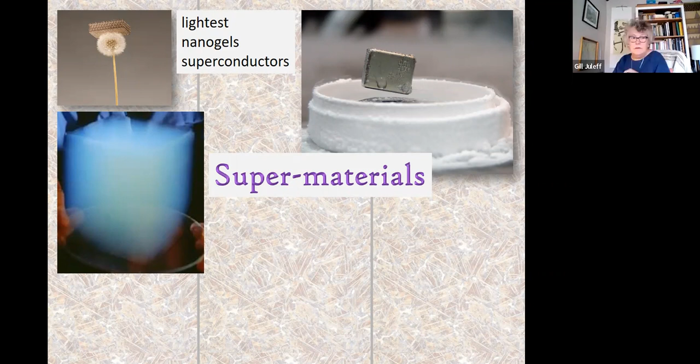But let's think about why... I'm not getting my PowerPoint to move on. Why is that? Oh, I think I know. There we go, sorry. Probably the original super material was in fact steel, and we're talking about a material which was first invented or emerged over 3,000 years ago. This is an amazing alloy of iron and carbon, and the fact that you need less than 2% of carbon in iron to create this incredible alloy. But getting 2% of carbon into the alloy is not a simple task to persuade it to go. So there's a lot of technology involved.

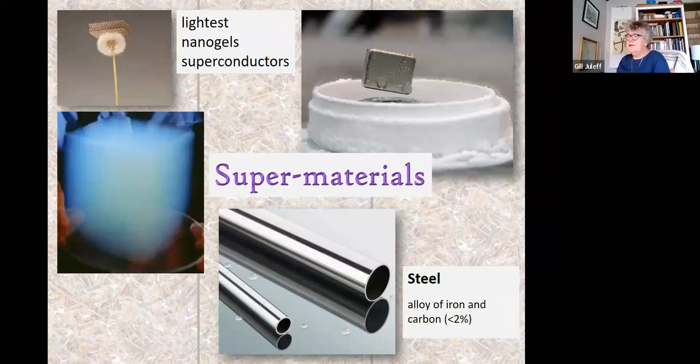So what can steel do for us? It gives us the chance of making tools that will cut and take edges. It allows us to make domestic tools, agricultural tools, and to cut very hard materials and carve them. We know from Sri Lanka the amount of carved granite - you can't carve the granite in Anuradhapura without steel tools. It allows you to make blades and edges that are hard, strong, and flexible. And once you can do that, you can start making weapons.

There's nothing that drives technology like the opportunity to make weapons. It's a sorry thing to say, but it is the reality. So this is the material we're dealing with. I'm going to introduce a little bit of technology - you're engineers, so we ought to be able to deal with this.

Making iron and steel is not easy. It takes a great deal of technological know-how and experience, and what I want to do here is look at some of the ways we can make iron and make steel. If you look at the bottom of the screen, this bar along the bottom is just a very simple way of describing different types of steel and the amount of carbon you need in the iron to create the steel.

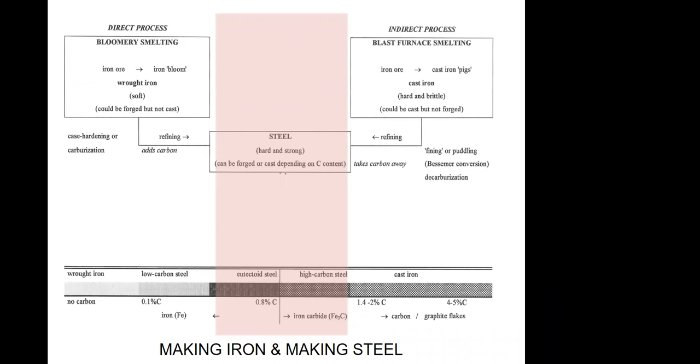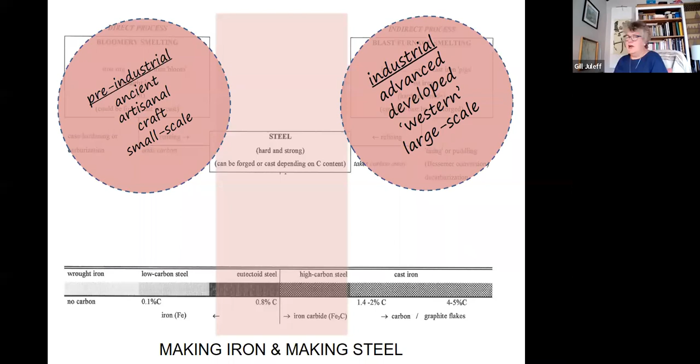It's this central area that is the holy grail of iron metallurgy, where we're making these steels, and how we get to that point. On either side of that, the direct process is perhaps what we would call the pre-industrial, the craft, the small-scale smelting, where I as an archaeometallurgist do most of my work. On the right-hand side, the blast furnace technology is what we would call industrial - it's advanced, developed, large scale, and in many ways dominated from a Western technological perspective.

Okay, I don't know, somebody's got a microphone on, I think, yeah?

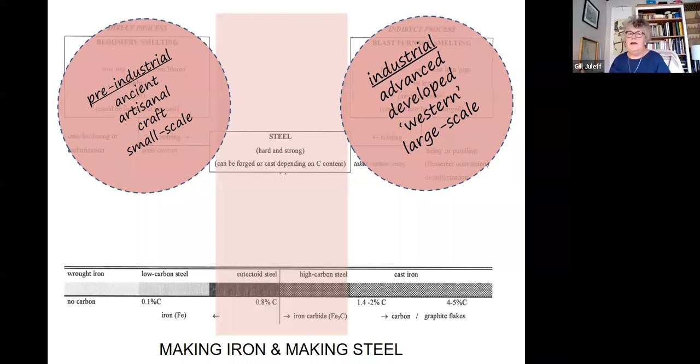So this is the indirect process. If anybody says to any of us here in the audience, iron making, making steel, these are the sorts of images that come into our head - blast furnaces, big industrial processes, very advanced.

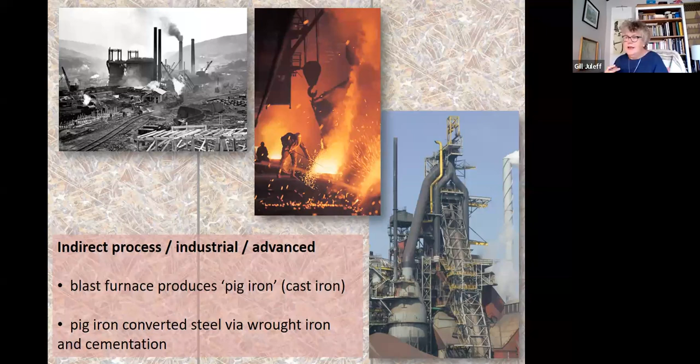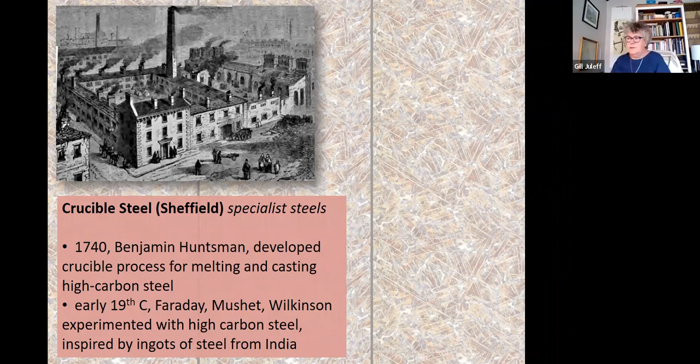On top of that, if we think about taking the material from a blast furnace and making these steels, particularly trying to make the really high quality steels, we have in the Industrial Revolution the development of specialist steels or crucible steels in places like Sheffield and elsewhere on the continent. We have famous steel makers - Huntsman of Huntsman Steel developed a crucible process for making high carbon steels. Faraday, Mushet, Wilkinson - all big important names in the development of steel technology in the 19th century, and big players in the history of the Industrial Revolution.

But what is really interesting, and rarely talked about, is that these people were taking their inspiration from high carbon steels coming from India, ingots of high carbon steels. We tend to sideline the fact that so much of the inspiration for the Industrial Revolution in the West, in Britain and in Europe, was actually being driven by technological developments in Asia.

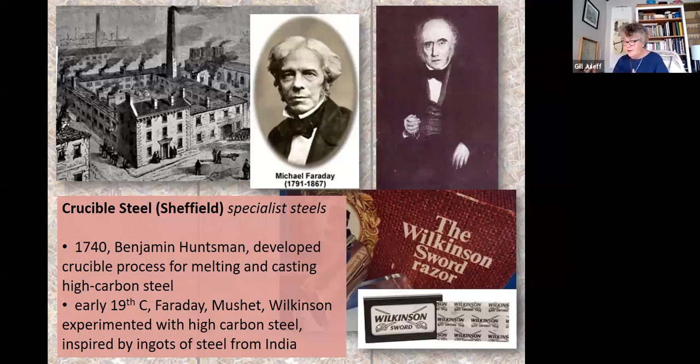Making iron and making steel takes an enormous amount of technological knowledge and experience. It also requires a high level of social investment, organization and planning. Because of that large scale of investment in the fuel, the apparatus and the infrastructure, and the months of planning before you even get to smelt iron, you need to succeed. There's an economic imperative to succeed. You can't play with this. It has to give a return. And it's in many ways why...

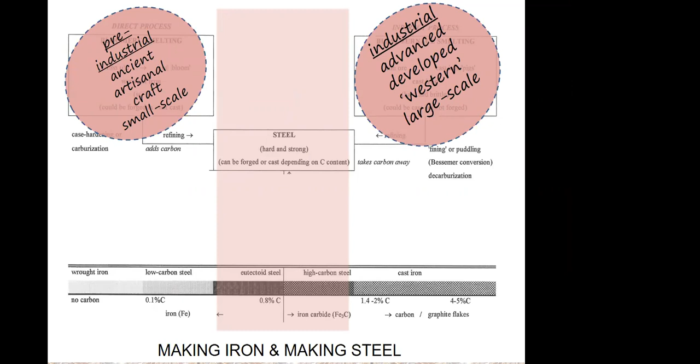...the whole Industrial Revolution dominates our thinking. When we think about making iron, we think of these big players who have the political ability to invest in this stuff. So we think about Britain, we think about Europe in the 19th century. More recently, in the late 20th century, we think of America, the USA, China, and also India.

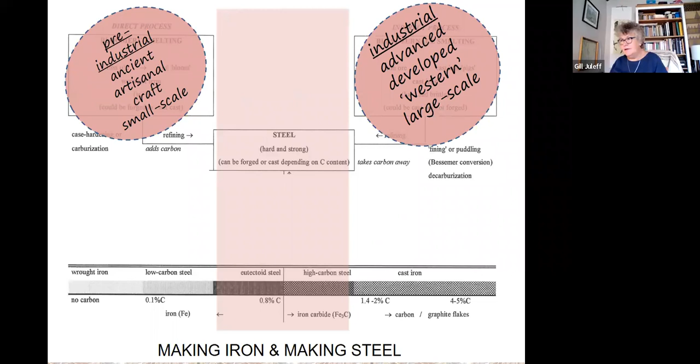We don't tend to think about places like Sri Lanka, which is why all of this is unexpected. But we do have some indications, some hints that there is more to understand about the technology of making iron and steel in Asia. And we also begin to understand there's a greater complexity to this rather simplified model we were using.

We know that the Industrial Revolution was taking the ideas of crucible steels from India, and we also now know Sri Lanka. We also now begin to appreciate that there are ways of smelting directly from iron ore to steel, and we see some of that in Japan, now in Sri Lanka, and occasionally in Africa. So it is a more complicated story.

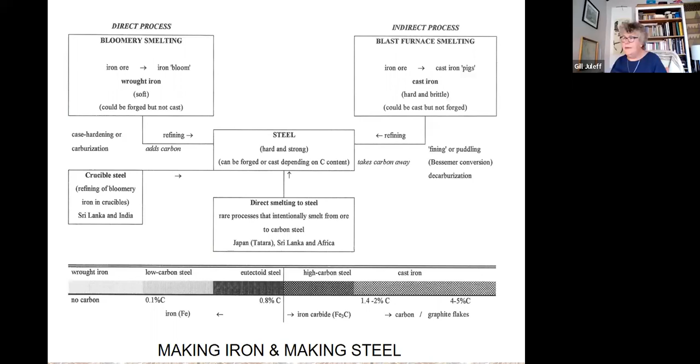To think about some of those hints about the technological history, and to come a little bit more locally in Sri Lanka, we can look at a treatise written in Arabic. This is a translation and interpretation of a treatise written in the 9th century by a very revered writer called Al-Kindi, who wrote a treatise on the kinds of swords and iron. In it, multiple times he mentions the quality of Serendibi, or Sri Lankan steel.

For a very long time, scholars thought that this was referring to steel that was made in India and was transshipped through Sri Lanka. Nobody really could quite believe that Sri Lanka was part of this production technology for steel.

If we look at foreign visitors to Sri Lanka during colonial periods and earlier, we see mentions about the quality of the iron and steel. We've got quotations here from 1608: 'These Sinhalese are very apt at manufactures and have a very cunning and delicate hand for iron and steel. They make all sorts of arms, which are the best and most valued in the Indies.'

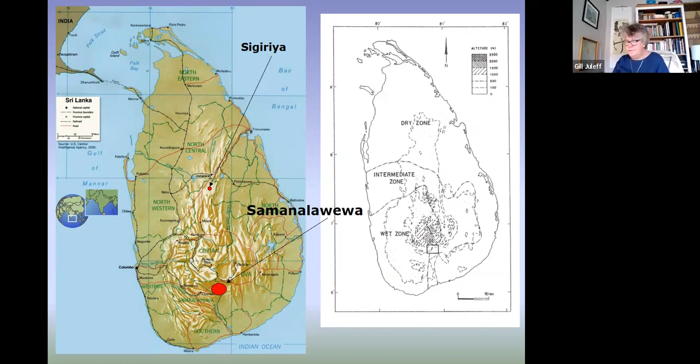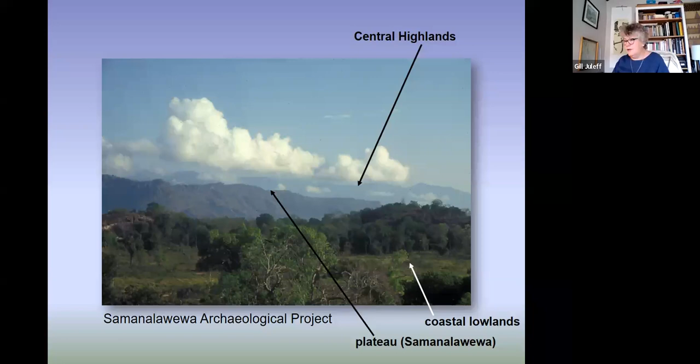But on that plateau, we have a very varied terrain, hilly terrain. We have cultivated valleys where we have rice cultivation, small village settlements, but the landscape is actually dominated by jungle and windswept hills. So certainly when we started the work back in the 1980s, it was not densely populated, and it's the hilly terrain that was where most of our work was concentrated.

Just to give you a short summary of what came out of our initial field survey: we did a survey that took us 3 months, with an additional 1-month survey extension, covering a core area of 58 square kilometers, which we then extended by another 20 square kilometers. Within that area, we identified and recorded 253 sites. These are all sites because this was a survey conducted with the Archaeological Survey Department, and we worked with a fantastic team there through the whole of this project.

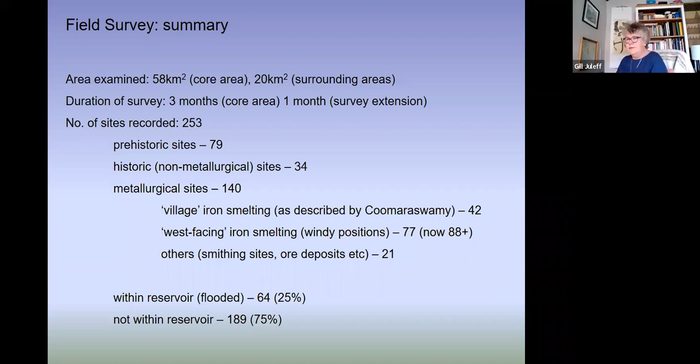So how am I doing for time? Not too badly. So let's look at what we found during our field survey. I just wanted to... no, you're all still with me.

Let's have a look at just a couple of points that came out of our field survey, focusing particularly on the west-facing sites. What we were finding was that we had waste slag, the rubbish from smelting, which is simply left on the site, dumped on the western slopes of these hilltops, not on the summits, but on the western side. So everything was pointing towards and facing towards the west.

What we also found was this slag waste has a very distinctive morphology. One of the things that people like me do when they study archaeometallurgy is to look at this waste and see what it tells us about the process. So the shape of this waste and the shapes that it takes is very useful, important, valuable research material.

So here we have some very unusual shapes of slag. Here's an intact piece which is over 1 meter long, which is exceptional. It's a long linear shape. And in this one, I don't know how clear it is, I hope it's visible to you.

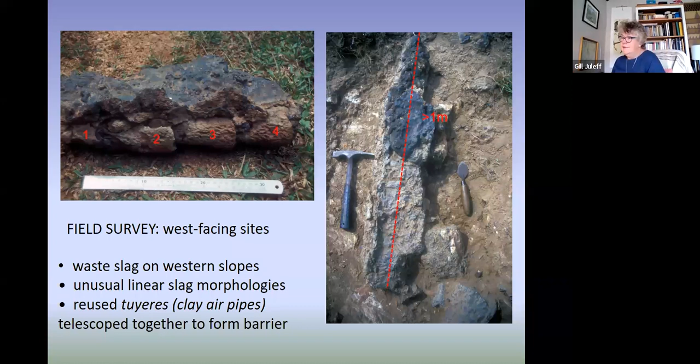slag shapes is that they do not conform with anything that we would conventionally see from traditional Western furnaces, the sort of thing that we would normally expect to find.

So, moving on, the evidence that we had from the field survey was sufficient for us to have funding to carry on and excavate one of these west-facing sites. And the site we chose is very close to the dam, the Samanalawewa Dam itself.

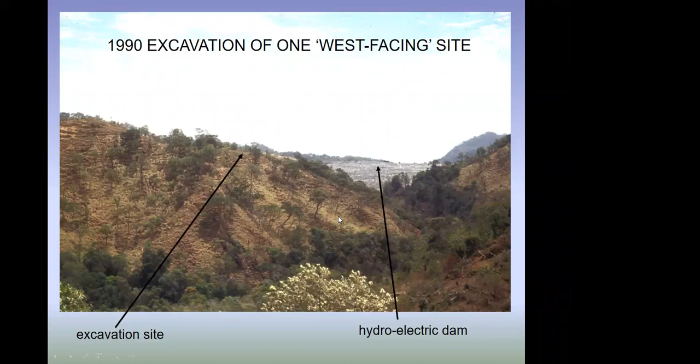This is the site that we excavated over a period of about 6 months.

What's important is that we have a series of radiocarbon dates from this site, and they date the activity on this site to between the 7th and the 11th centuries. Interestingly, coinciding with the date of Al-Kindi's Islamic treatise on swords and iron, where he discusses serendibi steel. So these dates coincide. On this site, we excavated something like 41 separate furnaces, and we only excavated less than 20% of this site.

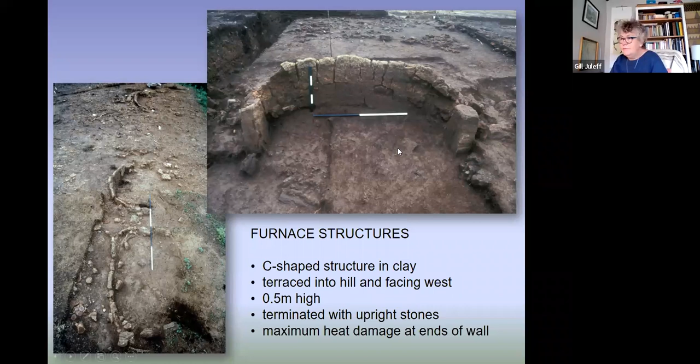There is the back wall of the furnace, that C-shaped wall, and here are the two upright stones. So this is very active, and the fact that you've got molten slag that's able to flow 2 meters away from a furnace into the face of these very high velocity winds suggests that this is working at very high temperatures.

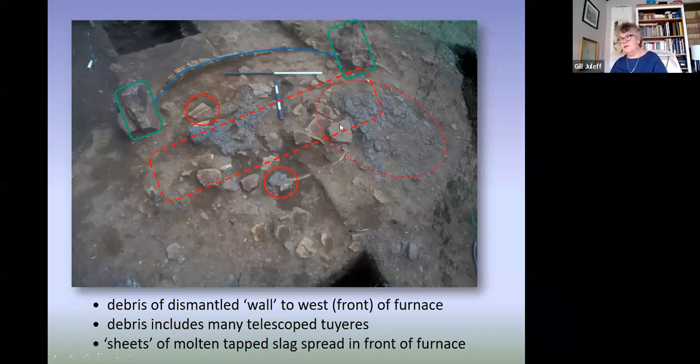So moving on from the excavation and the survey, the evidence that came from the survey and the excavation was strong, convincing, told a very good coherent story. It demonstrated a widespread industry across this region with multiple sites, all based on this very unusual linear shaped furnace that was using the dry southwest monsoon winds. That was all very convincing from an archaeological point of view.

But the problem that I encountered was when I presented that data to the international community of archaeometallurgists, I was met with enormous skepticism. They were simply not prepared to believe this evidence, because they said that no iron smelting furnace has ever been demonstrated to be able to operate using the wind. The furnace is too long, it's too low, and it's in Sri Lanka, and nobody would expect that.

So on the basis of that, we concluded that the only way we could take the research further was to actually reconstruct a furnace during the monsoon, to see what actually happened, and if it could reach the temperatures we needed it to reach to be able to smelt iron, and how it functioned. That's what we set out to do initially in 1994 and then again in 2007.

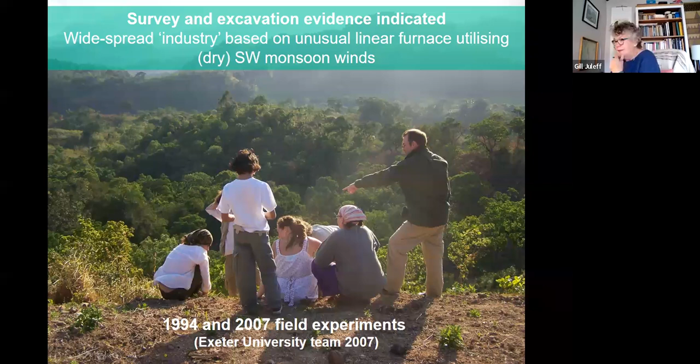And so the next set of slides come from the various different experimental smelts that we've undertaken, and they're just to give you an overview of that process.

It also gives you an idea of the amount of social investment and planning that has to go in before you even get to the point of being able to smelt iron, or at least attempt to smelt it. I need to say, I had never smelted iron before doing this, and I'd never actually even seen an iron smelting furnace in operation. So I was definitely working in the dark, but working off the archaeological evidence. We were simply trying to recreate the archaeological evidence to see what happened.

So to start with, we needed a lot of fuel. Our local blacksmith friends made over a ton of charcoal fuel for us from species we knew were used in the archaeological record.

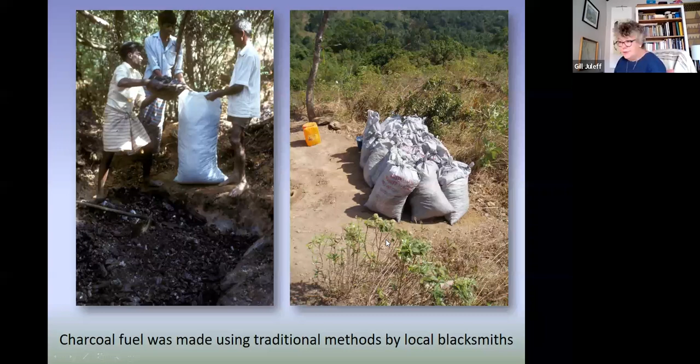We collected iron ore from local sources. They're all surface deposits. It's a really good lateritic iron oxide, mixed iron oxide, which is very good for smelting in this sense, because it has a good iron content, over 60% iron content, but plenty of other minerals which help in creating the slag and help convert the iron oxide to iron metal.

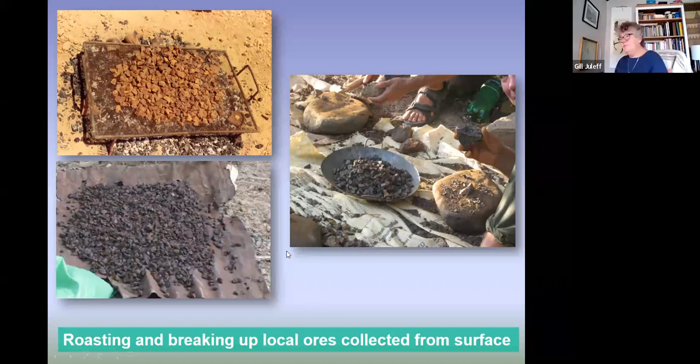The other thing which is important and tends to get forgotten is the clay used to build these furnaces. These furnaces have to operate well over 1,000 degrees centigrade. This clay has to resist those temperatures. It has to remain standing. So the container for iron smelting is extremely important.

With the help of our local villagers at Samanalawewa, we put together a mixture, a very complicated mixture of paddy field clay, termite hill clay, river sand, straw, and rice husk, which was very carefully mixed and matured to build the furnaces.

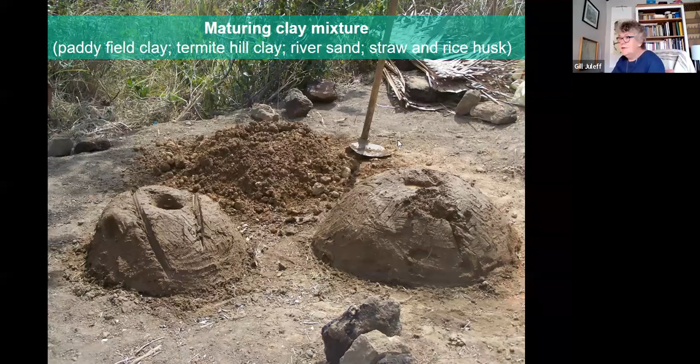So we then built our furnaces. All of this construction is based on archaeological evidence, apart from the wooden poles that we put in here, because we struggled to get our wet clay wall to stand upright. So we used poles just to help keep it stable, and they burnt out during the smelting.

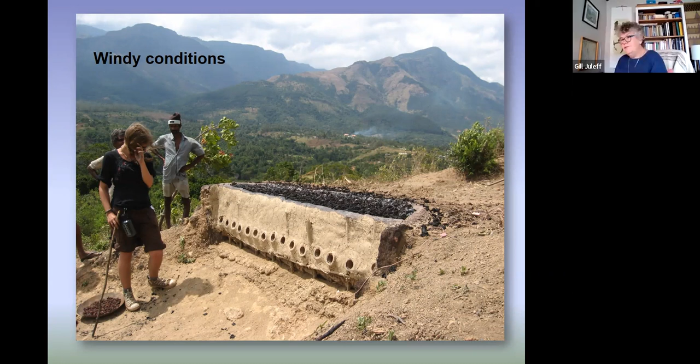This is what it looks like when we put the first iron ore in the top, on top of the burning charcoal. And that is replenished all the way through the smelt.

We were using anything up to 200 kilos of charcoal per smelt and 100 kilos of iron ore. So we keep replenishing that over 6 to 8 hours. The thing to note here, amongst the engineers and scientists, is the scorching on the top of this front wall.

There's very clear scorching, which you don't see to the same extent on the back wall. We'll see more of that as we go through.

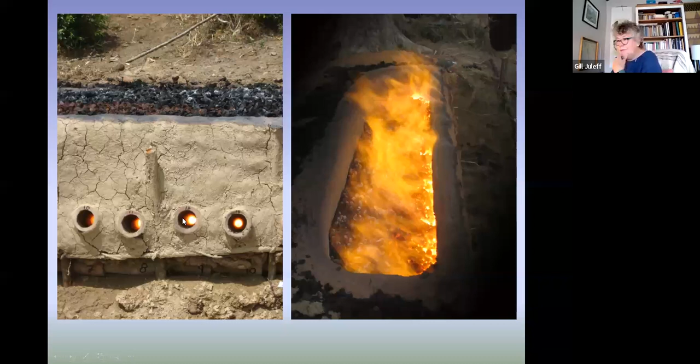Again, the same thing, but what we're beginning to see now is the flow of air and the flames that are actually coming up the inside of the front wall. Charcoal is burning more aggressively at the front wall, so it's tipping down here. The flame is coming up and curling over the top of the front wall, and if you imagine this facing into a very powerful wind, one that may be blowing at 60 or 70 kilometers an hour.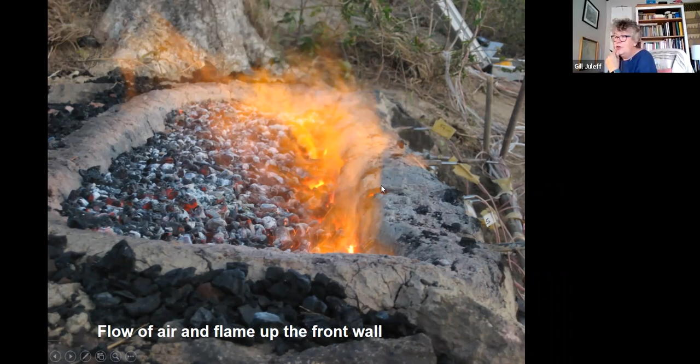So you can't easily see inside the furnace. You can look down the tuyeres, but you don't quite know what's going on until you see that first run of slag. This is the molten waste, a silicate that melts at 1100 degrees centigrade. Once you see that, you know the right sorts of reactions are taking place inside the furnace.

On a number of the smelts, we were able to use pyrometers to record temperatures. Right in the combustion zones, we reached some phenomenal temperatures, over 1400 degrees centigrade, and in one case over 1500 degrees. So without pumping a bellows or doing anything, this furnace of its own accord will run at very high temperatures.

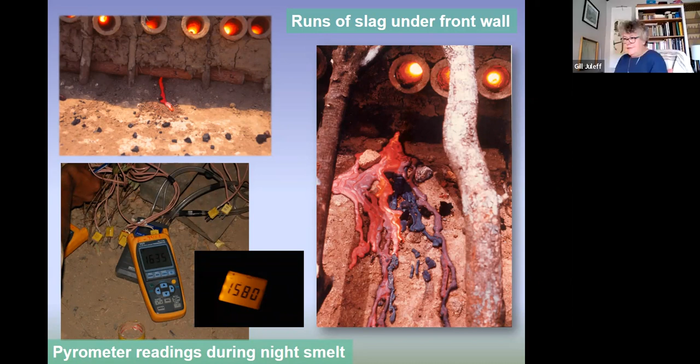This is how the structure looks well into the smelt. You can see we've had a lot of slag coming out of the bottom. The wooden poles we put in to help the front walls stand up have all been burnt out, and the corners of the furnace are burning down quite heavily.

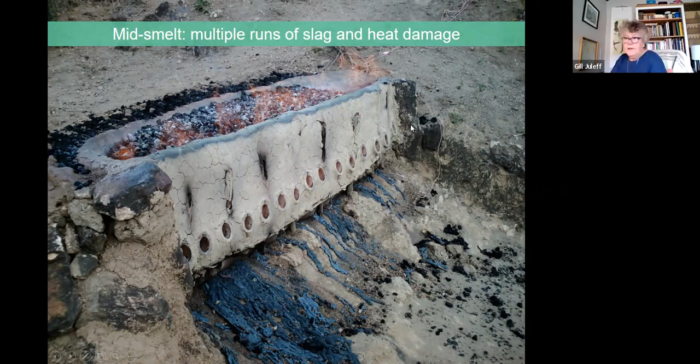Almost all of the smelts we've done went into the night. The reason for that was it enabled us to see the flame and gases on top of the furnace more clearly, and it's also a very dramatic experience.

What it allowed us to see, this is looking down at the furnace with the wind coming from the west, was the way the airflow within the furnace would come up the inside of the front wall, then curve over the top into the face of the wind, and be driven back by the wind.

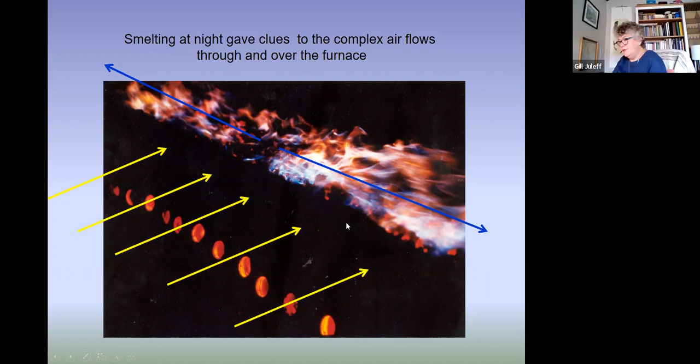The same again on this slide, from our first experiment. The wind is coming from the west, and yet the flame is flowing in a completely different direction, perpendicular to the wind, which tells us that the top of the furnace is within some sort of protective bubble, not being impacted by the wind blowing from the west. I'm not explaining that carefully, but we'll see more of that in a moment.

So we get to the end of the smelt, 6 or 8 hours into it. We decide that we need to bring it to an end. We do that by pulling down the front wall, and we did this because that's what the archaeological record seemed to be telling us.

It's probably the most dangerous thing you can do. It would never be allowed in this country—health and safety would have me in court for doing this. But that's what the archaeology seemed to be telling us. It's very, very hot; you can only do it at a great distance with a 6-foot wooden pole. It takes a lot of effort, and this is the sort of mess that gets made.

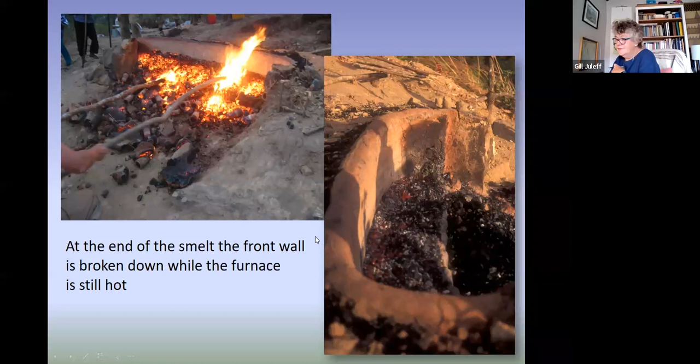This is our furnace soon after the smelt is completed. What's really exciting is that we see this line of tuyeres here, the front wall has all collapsed, we see the damage in the corner of the furnace, and the relative lack of burning on the back wall. This looks very like our archaeological furnaces, and that's one of the most important aspects of these experimental reconstructions—the way it mirrored the archaeological evidence, verifying it.

Oh, I've still got plenty of slides to go through. Are we all okay for time? Anybody? Yes, please continue. It's an interesting presentation, please continue.

So just to look at that idea again, at the bottom of the screen is the image I already showed of the archaeological furnace, where it looked like the front wall had collapsed and there was slag all over the place. On top is our furnace after we'd finished smelting. So not only was the furnace doing similar things, we were taking similar actions as well.

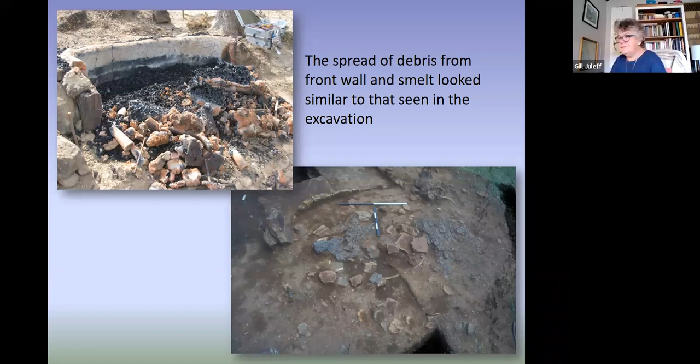So the big question is, what did we make in our furnace? You can see here we're breaking up the slag at the bottom, and out of that mess we retrieved several lumps of iron, what we might call metal blooms, iron blooms. Not very much—I would certainly not market it as an iron-making process in the commercial world, but we did make iron.

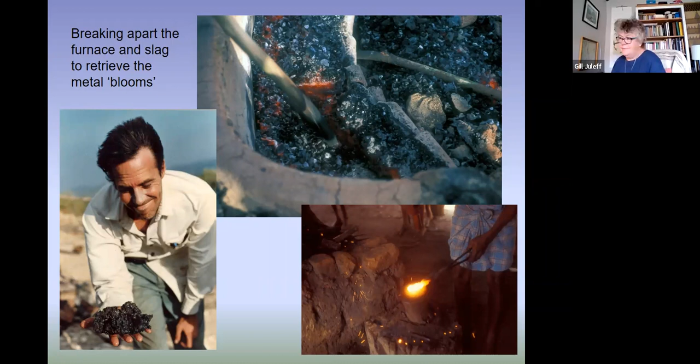We took it to the local blacksmith, who at first was very skeptical that it contained metal, but we persuaded him, and he forged it successfully into a small bar within less than 20 minutes. What he had smithed from our bloom was in fact low carbon bloomery iron, just the sort of material we were seeing in that diagram in the pre-industrial traditional process.

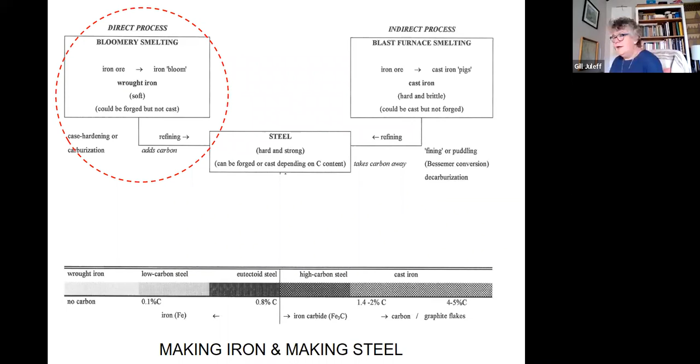However, we then went back and looked again at all of the stuff that had come from our furnace, and we found that actually half of the metal we'd made was still stuck to the slag at the bottom of the furnace. Clearly a shortcoming in our technique in that we weren't able to separate this metal, but this metal, when we analyze it, is high carbon steel, and it's been molten. You can see that from the shape it's forming here. It's been liquid, and it gives us a very different microstructure.

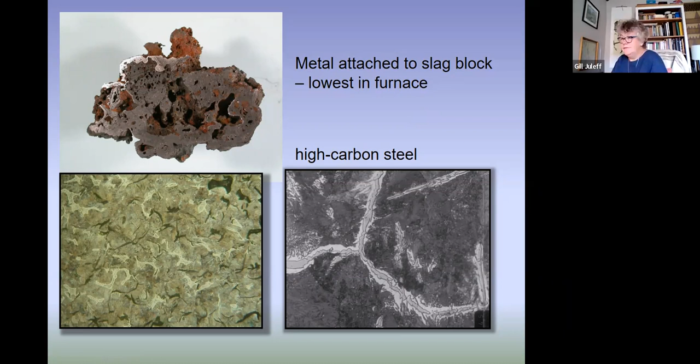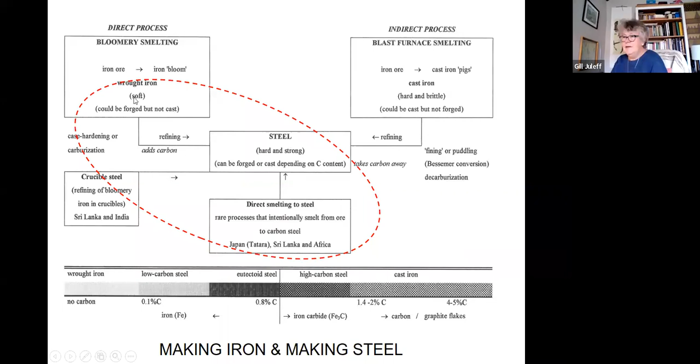So our furnace was capable of smelting direct to high carbon steel. Rather than being stuck in the bloomery side of this diagram, we're now covering much, much more. We're directly smelting the steel. We don't have soft bloomery iron, so quite a different technology.

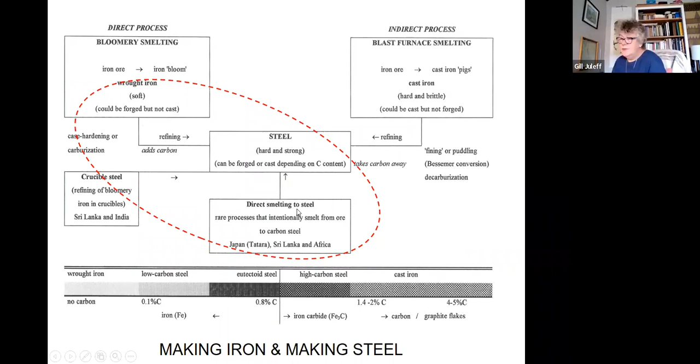There was great excitement about the results of our experiments. All of those archaeometallurgists who had been skeptical very generously changed their minds and accepted all of these results, and Sri Lanka was put on the international stage in terms of making iron.

What also, as an addition to that, reinforced the overlap between this west-facing technology and all of these sites at Samanalawewa, all capable of producing high carbon steel, and the overlap with this description of Serendip steel being used in the Islamic world at exactly the same time for sword making. So it's possible that this steel used for Islamic swords was not coming from crucible steel, which is another technological story we can save for another lecture, but possibly coming directly from these furnaces. There's still a great deal of research to do with this, but it's important.

But what came from all of the excitement about those experiments was a lot of discussion about this unique technology in Sri Lanka, and that was the big fanfare. But I was never comfortable with that.

In the back of my mind, I kept thinking, is it unique? You can't use the word unique. Technology is rarely unique. It's part of a process of innovation, of adaptation. If you call something unique, it's a one-off. It doesn't go anywhere, it hasn't come from anywhere, it stands alone. And I can't believe that of this technology.

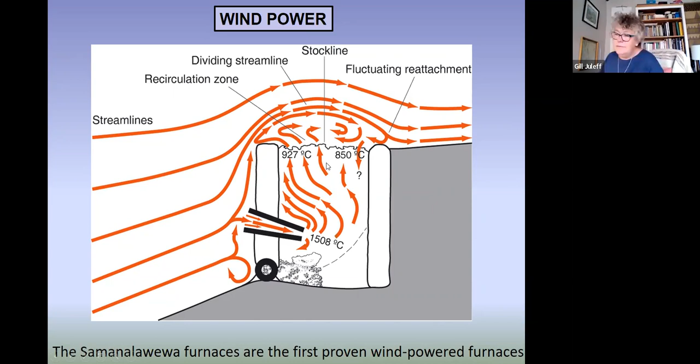Since then, we've done some work using computational fluid dynamics at Exeter and refined our interpretation somewhat. More importantly, and really exciting—I hope some of our authors are here in the audience—I now see that there are two new papers using computational fluid dynamics to further analyze these furnaces and understand them. I think this is a fantastic research road to go down. There is so much that will come from this. I'm really pleased to see that.

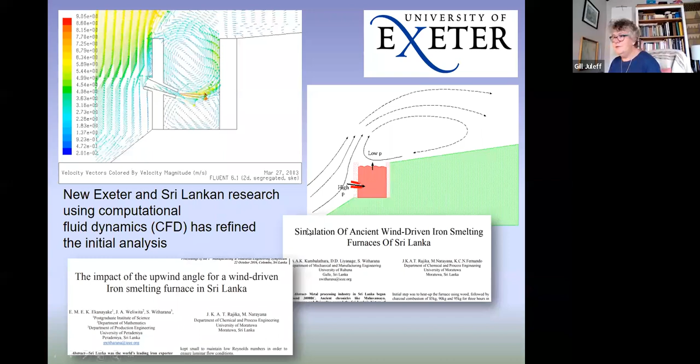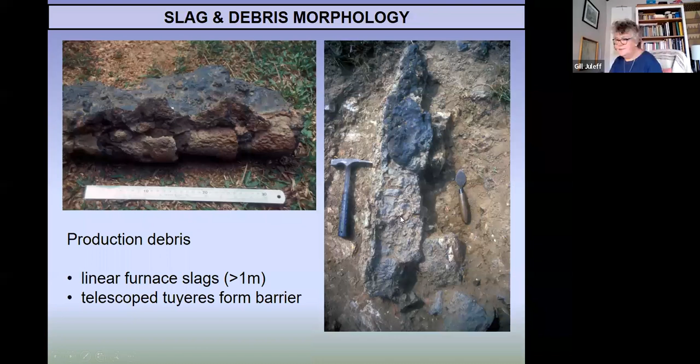Beyond the wind power, there's more to this technology. We have this slag morphology, the slag debris, and what that tells us. Having identified these structures in our field survey, we can see these shapes from our slags are very distinctive and particular, helping us reconstruct how this technology and these furnaces were constructed and how they operate.

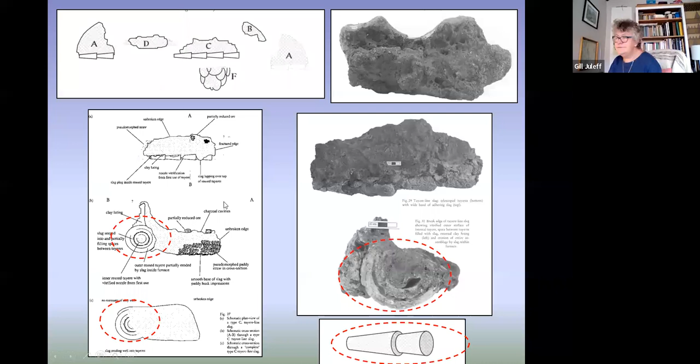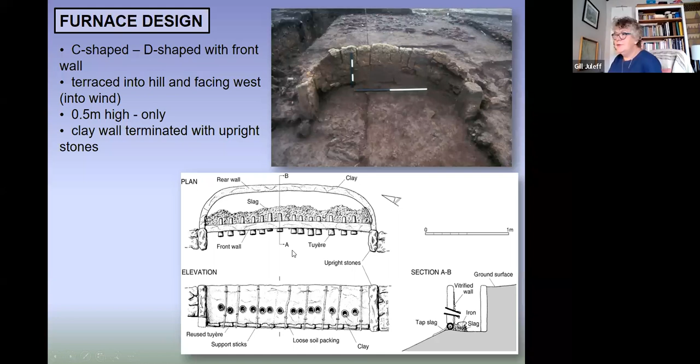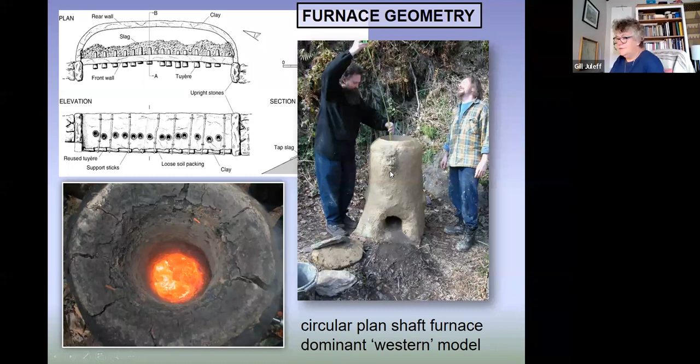What's really important is this design is radically different to the dominant Western model of a shaft furnace, the circular plan of a shaft furnace. This is totally different. That shaft furnace could be an iron age furnace or a blast furnace, but that is the Western or dominant model.

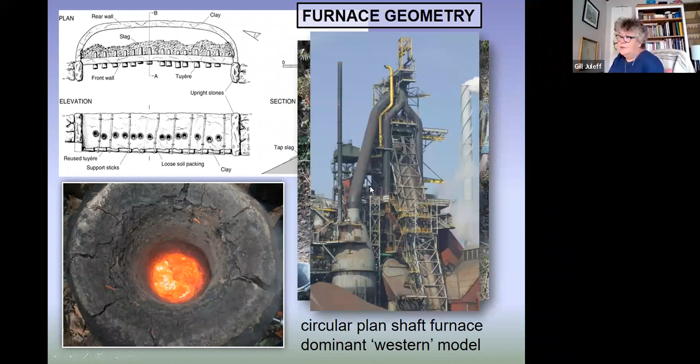So we looked at that in more detail and thought, what is the impact of that different geometry? What can we learn from that? Looking at our traditional Western circular plan furnace, we can think about this as the effective unit area of the furnace - what you need to create for a furnace to operate. You need to create the right level of combustion with a given amount of air. Once you do that, you can construct your apparatus around it. So this is perhaps our starting point.

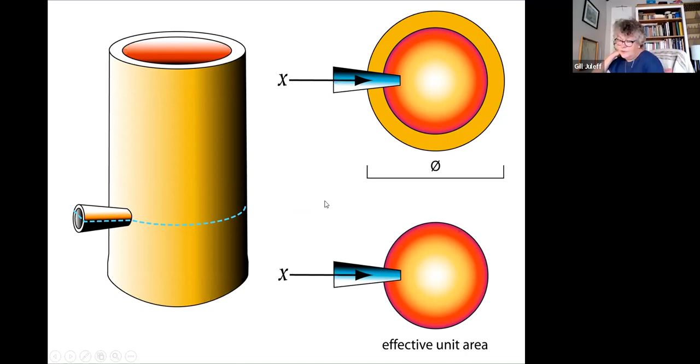However, if you've got that shaft furnace and it's successful, and you want to make it bigger, you make your furnace larger, but you immediately hit a problem because you have to blow in more air, and most effective unit areas are optimized for the amount of air you're able to blow into it. So if you want to double the diameter of your furnace, you've got to blow in at least 4 times more air, or increase the flow rate by 4 times.

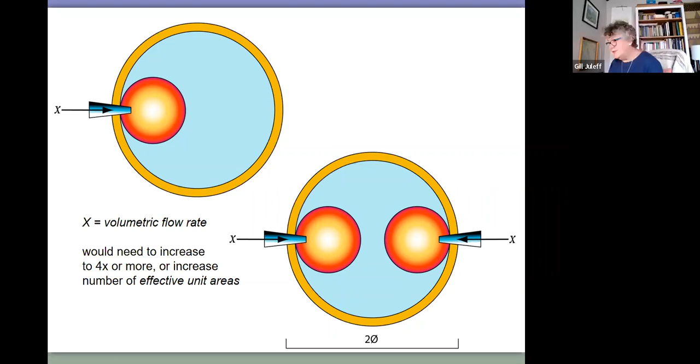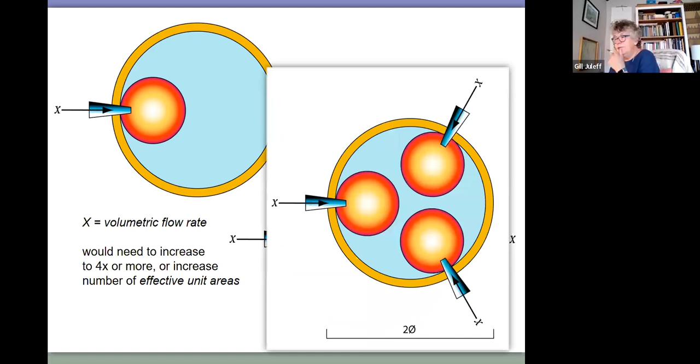A better way to approach that would be to increase the number of effective unit areas. So now you've doubled the size of your furnace, the diameter of your furnace, you've added another unit area. More effective would be to put 3 in there. Let's follow that idea through a little further, and I'm sure the engineers amongst you are going to query some of this, but it makes sense to me.

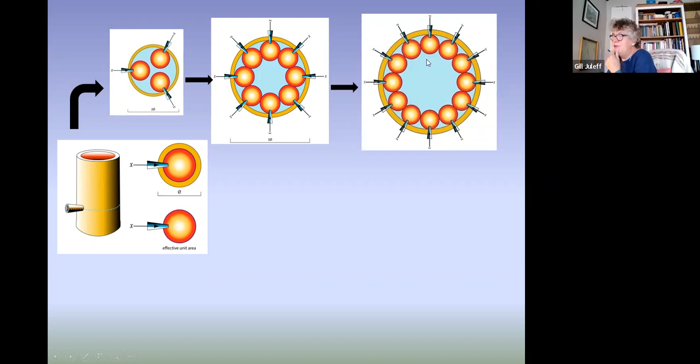So you want to scale up and develop your shaft furnace. What you do is add additional effective unit areas, giving you more points of airflow into your furnace. But as you scale up, you start to create a dead area in the center of the furnace. Just by increasing by 3 diameters or greater, you put your furnace into a difficult situation, because you now have a zone of combustion around an inactive column of fuel. This is exactly what happened with the blast furnace - this is a blast furnace design, and you have a real problem with this geometry.

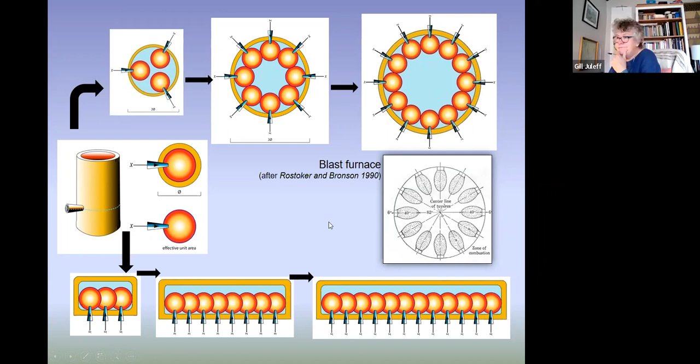So that's deconstructing the design. The next set of questions we had were: where did this technology come from, and what did it influence? And that whole question of how unique it is. Still in the back of my mind is - is it unique? Can we call it unique?

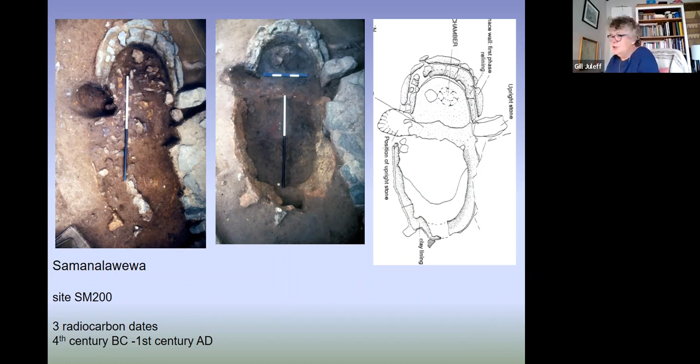What we have at Samanalawewa in our archaeological record is one much, much earlier furnace - one that looks different and is dated to the 4th century BC, almost 1500 years earlier than our wind-powered furnaces. But if we look closely at this furnace, we can see similarities. We have a structure, albeit somewhat smaller, where stones connect a curved clay furnace wall. This stone has been robbed out, with a straight wall across the front. We know from the debris that came from this furnace, it had multiple tuyeres. If we simplify this furnace into a schematic footprint, this is what we're looking at: 2 stones, a back wall, and a straight front wall.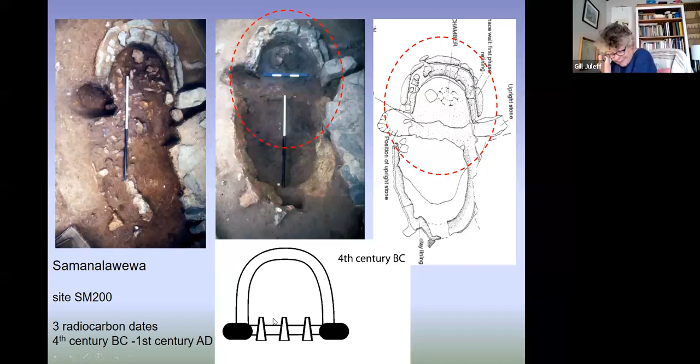Now we're going to look at the furnaces at Sigiriya, which were excavated by Swedish archaeometallurgists with another team from the CCF.

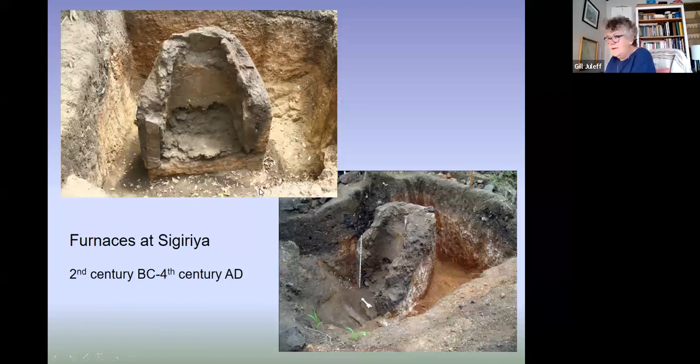You can see some similarities here. A better image is this. These are taller, bigger furnaces, but again, if we look at the excavation plan, we have upright stones connecting a clay wall with some sort of straight barrier at the front, which is dismantled. If we translate that into a footprint, this is what we're looking at.

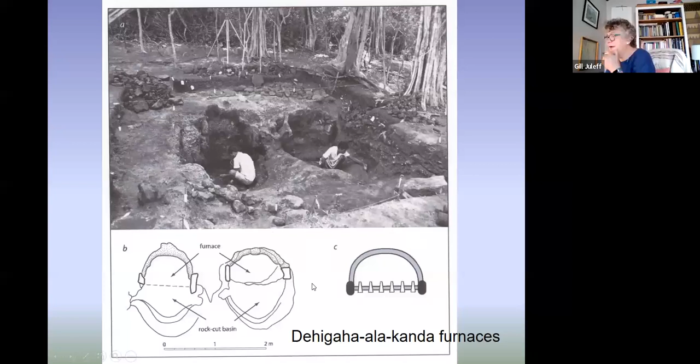It's beginning to look familiar. Now, if we look back at our furnace we've looked at several times, which is in our 2nd phase at Samanalawewa, dated between the 9th and the 11th century, we think of this in terms of two measurements: the distance between the upright stones, and the distance between that front wall line and the back wall.

Let's start with our earliest furnace at Samanalawewa in the 4th century BC. We have the distance between the two stones at 0.5 meter, and the distance from the front to the back wall at just over 0.5 meter. So it's more or less equiaxed.

Look at Sigiriya, which is a little later in time. We've extended the front wall, but we've reduced the distance between the front and the back. Then if we look at the first phase at Samanalawewa, we've even further extended the front wall, and again reduced the distance from the front to the back.

You can see what's happening here. So when we get to the 2nd phase at Samanalawewa in the 9th to 11th centuries, we've taken our furnace length over 2 meters, but we haven't changed the distance from the front to the back. So we have here, in archaeological terms — I hope in engineering terms too — a very convincing evolutionary series where we've gone from an equiax furnace to a linear furnace.

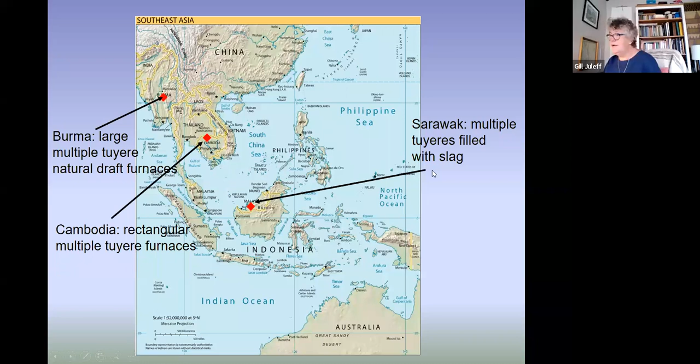We're going to start in Burma, with sites near Pagan investigated by Bob Hudson from Sydney University — furnaces that he says produced iron and steel, or rather, he says we know they produced iron and steel. They date from the 11th to 13th century, possibly earlier. He describes side walls tapering outwards towards the bottom, forming a long, narrow base.

Well, these same furnaces were actually described as early as 1864, in a very famous series of books called Percy's Metallurgy, in which he describes the natural draft furnaces of Burma. These are not wind-driven furnaces — they use the height of the chimney to draw air through.

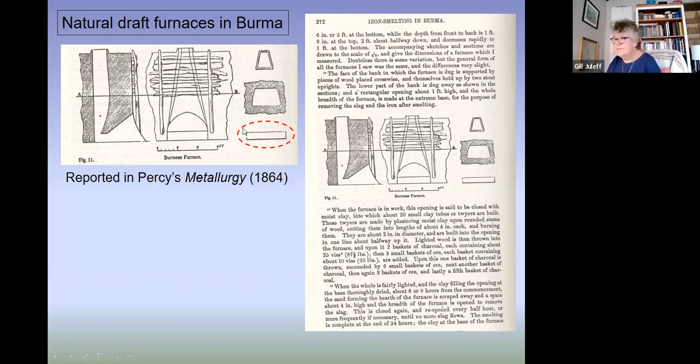But what's important here is that the base of this furnace is a long, narrow slot. In his description, Percy says it's 5 foot at the bottom, while the depth from front to back is 1 foot. The opening at the bottom of the furnace is closed with moist clay, into which 20 small clay tubes or tuyeres are built. So if we translate those measurements into a schematic footprint, in the way we've been using so far, this is what we get at the base of this furnace. So that looks familiar.

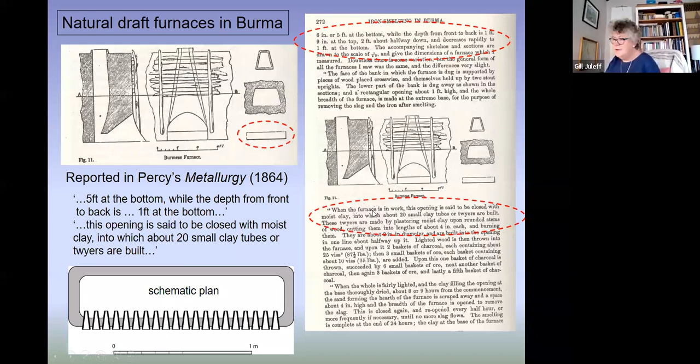Now let's move to Cambodia, to an account known from ethnography. Again, it claims to be making iron and steel. We know it operated in the 19th century, though it could well be earlier.

The description says it's long rectangular in plan, 0.9 of a meter wide and 2.5 meters long. Each side has 26 holes with 26 tuyeres projecting some distance into the furnace. All tuyeres on each side are connected by bamboo tubes to a common bellows. So this is neither a wind furnace nor a natural draft chimney furnace, but a bellows furnace.

But if we again use those same measurements to create the footprint, this is the image we get. Again, it's looking familiar.

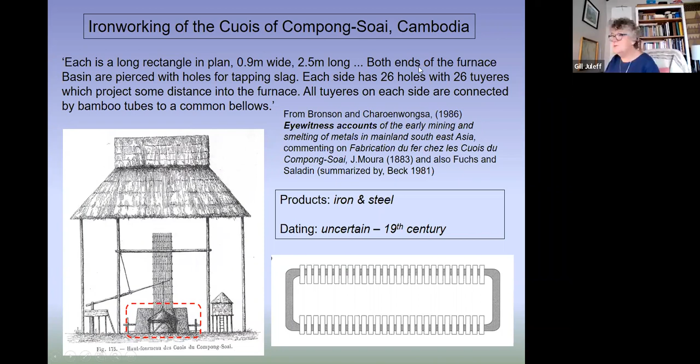If we now go to some evidence from Sarawak, we have here not a furnace, but descriptions of slag morphologies. I'm not going to read it all out, but essentially what they're describing is this same slag morphology we see for our telescope tuyeres, tuyeres captured inside these cylinders. They don't fully understand it, but they have described this—something very reminiscent of our technology in Sri Lanka.

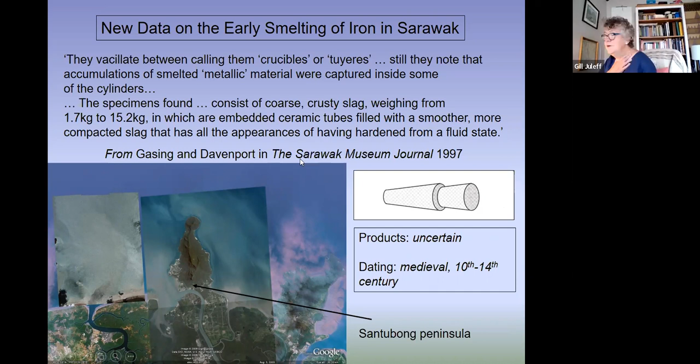Finally, we move to Japan, where we know we have very famous steel making in furnaces called Tatara furnaces. When we look closely at this Tatara furnace, which is often regarded as a technological outlier—an unusual, even unique furnace—the term unique has been used for the Tatara steel making furnaces of Japan.

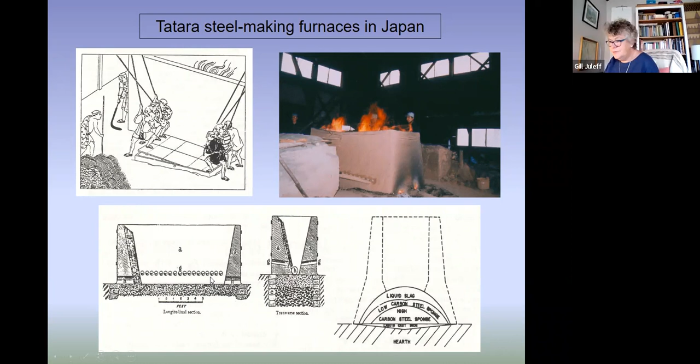But let's look a little more closely. Again, this is a bellows driven furnace, driven by manual bellows, a rectangular structure with multiple tuyeres in the long sides of the furnace. We know it makes steel, we know it makes iron.

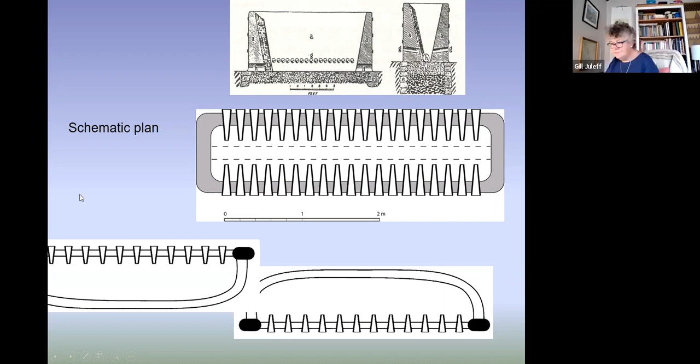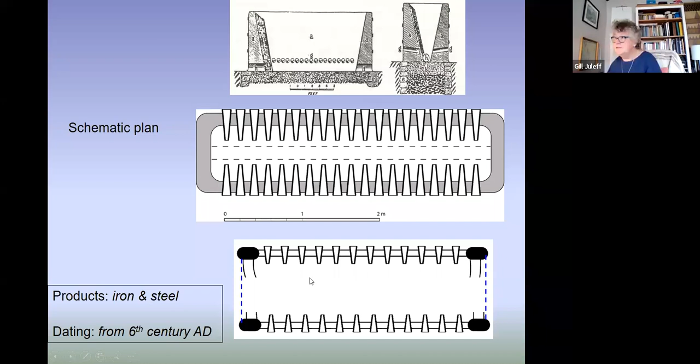We know that the Tatara furnace produces iron and steel, and it dates from as early as the 6th century. So our bits of evidence, for me, suggest that we have an Asian technological tradition of direct steel smelting in rectangular or linear furnaces with multiple tuyeres. The earliest of these is our evidence from Sri Lanka, and all of these fall later.

The only one which is wind powered is our furnace in Sri Lanka, our hilltop furnaces in Sri Lanka. So we're not talking about a tradition of using wind power—we're talking about a tradition of direct smelting to steel in a different furnace geometry. As far as I'm concerned, we cannot and should not use the word unique. That's my message today: it's not unique, it's a major contribution to the history of non-Western technology.

And I think I finally got to the end. Apologies for the length of time it's taken. Thank you.

Back with you. Am I? Is anybody remaining? Anybody left? Yeah, no, we are still there. It was a very nice presentation, Gill.

I think first of all, it was an excellent presentation with a lot of information, but I want to thank you for taking Sri Lankan heritage to the global community. Thank you very much. We really appreciate your commitment to this field, right?